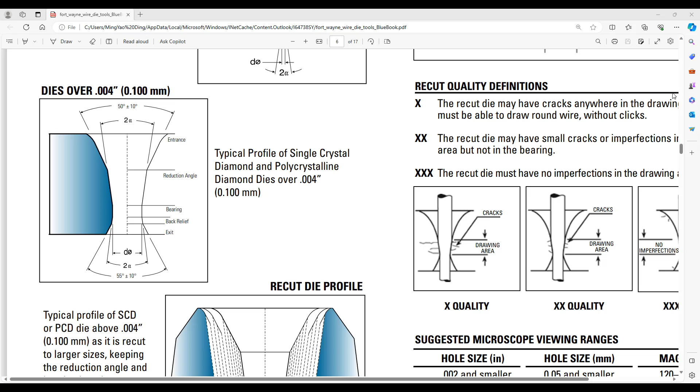This is their blue book, so I'm going to give a quick demonstration of how we can model wire getting pulled through this die using Ansys Mechanical. So we're going to start with this, and I'm going to take a picture of it. We always need a geometry when we do analysis, so this will be my geometry. A simple picture. Then I'll start going to the Ansys Mechanical analysis system and start by creating this geometry for a static structural simulation.

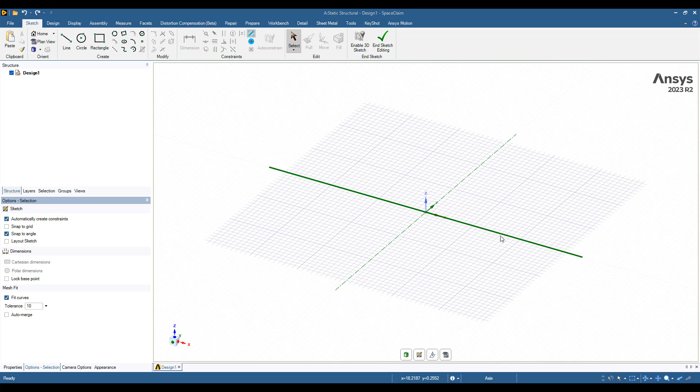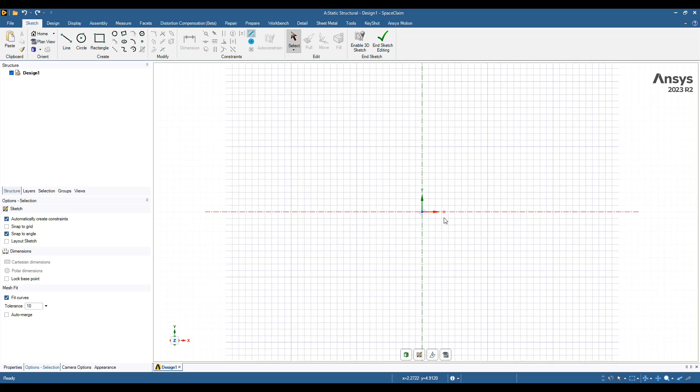Okay, here is my Ansys SpaceClaim, a CAD modeling tool. I'm going to start by sketching on the XY plane. We're going to do an axisymmetric model, which means Ansys would require us to have our drawing be on the XY plane, and it needs to be on the right hand side over here. So I'm going to copy and paste my picture in.

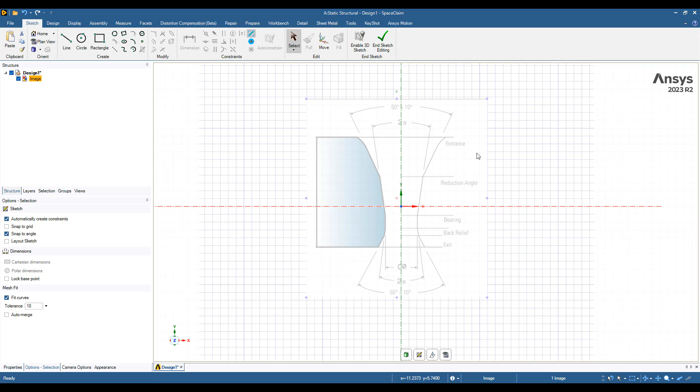You can see I can kind of carefully line it up with the background image where this line of symmetry is. I want to extract this and move it over. So I want the actual die part to be on this side. So I'm going to do a rotation and rotate it about, let's try to move it back into the right location here. Looks like the way I cut it, but that looks fine. So we're going to feed the wire in from this side and have my diamond die over here. So I'm going to show you the whole process of doing one of these.

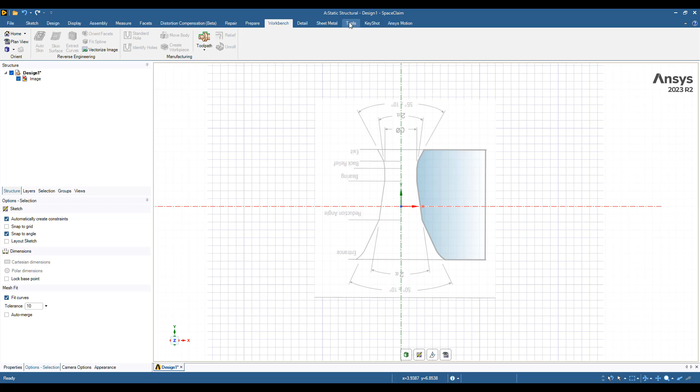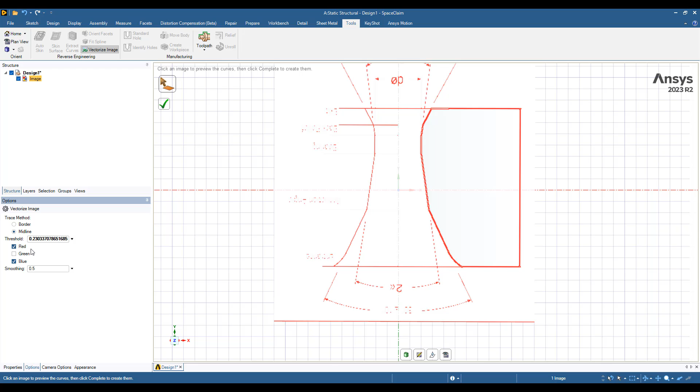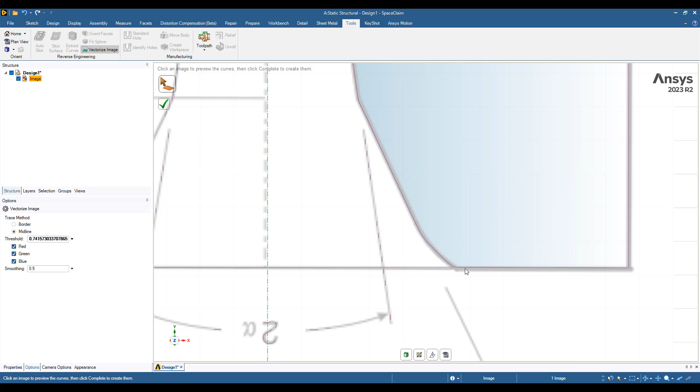We have an option to vectorize this image. You can see it's automatically creating a vector. We want to do the midline, and I want to maybe not include the green part, and maybe change the threshold a little bit. There you go. So that pretty much looks like it's got a good capture of the shape of the die. Obviously, if you're using CAD tools, you can create these much more easily.

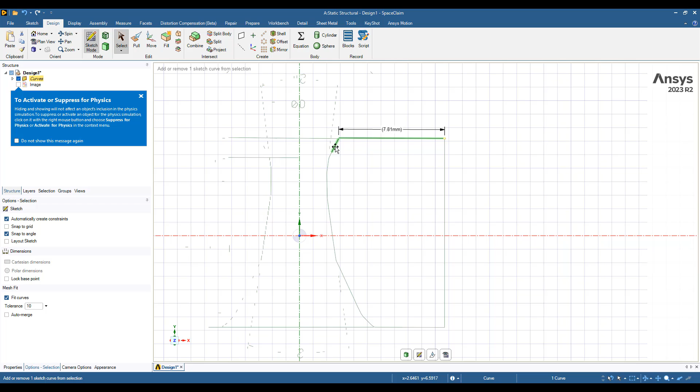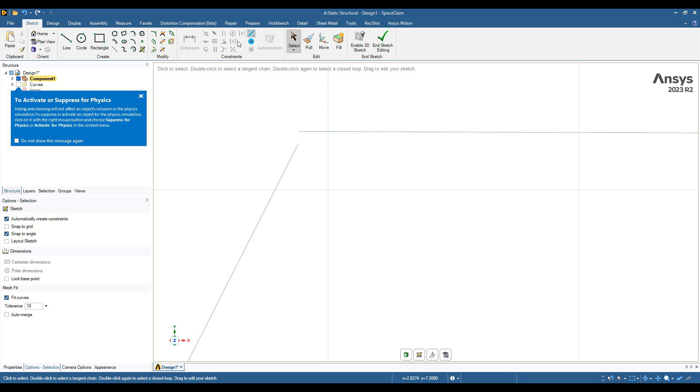So I'm going to hide my image here and select the curves. Gotta get out of my, there you go. So these are the curves I want. And copy and put the curves in there so I can get rid of the other curves. This is the only one I don't need. You can see there's a little bit of a mismatch here, so let me patch up that curve. There you go. Let's go ahead and trim out any excess over here. And that looks like it's a pretty good fit.

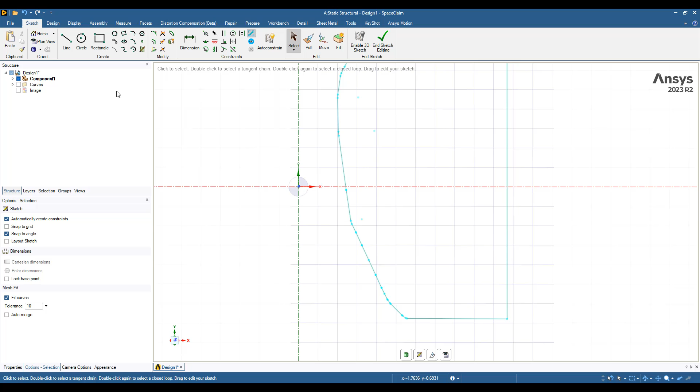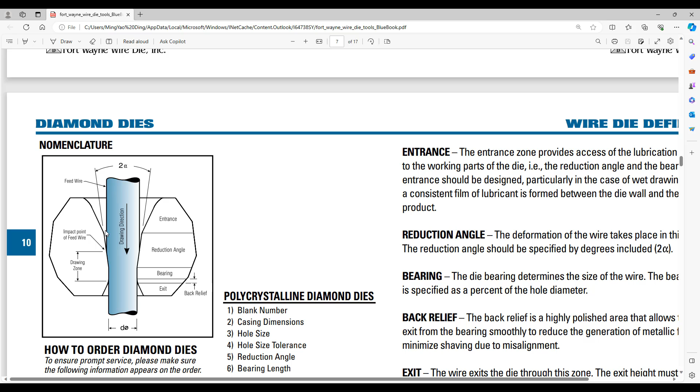So let's delete all my other curves, and then I can select all of this. And I'll use my fill button to fill it in. So now I have a surface that represents my curves. Okay, so that is the die, and the cable will go through here. I'm not a cable designer, but it looks like the cable should intersect maybe the middle of the first angled section after the flat section. So that to me is somewhere over here. So let's go ahead and do some sketching.

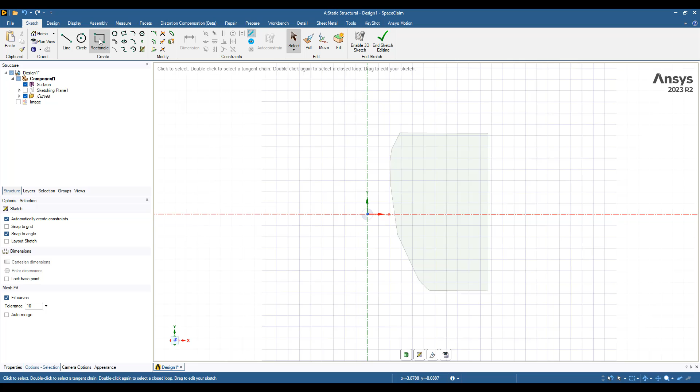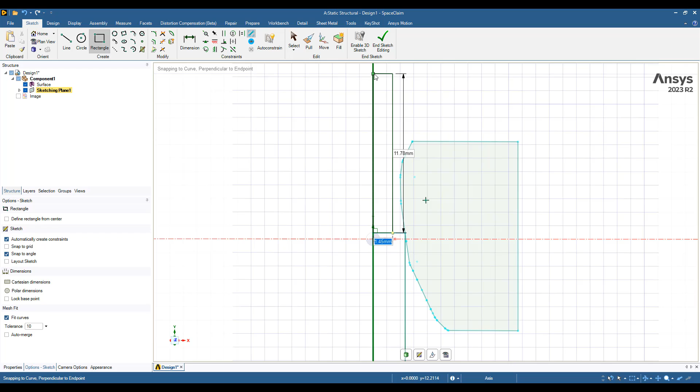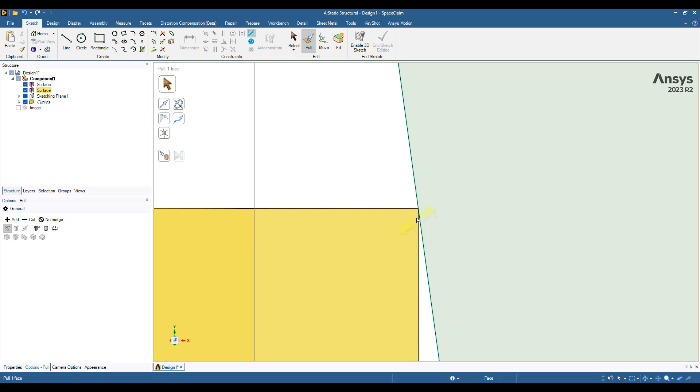We'll go back to sketch mode on this, and we will maybe start somewhere here and draw a cable. We're going to use the center line here, the y-axis, as the line of symmetry, and I'll go ahead and do another cable here so I have something to pull on. Trim out the excess, and I think if I hit the P button here, it'll fill that out as well. It's a pretty sharp corner. Let me round it out a little bit.

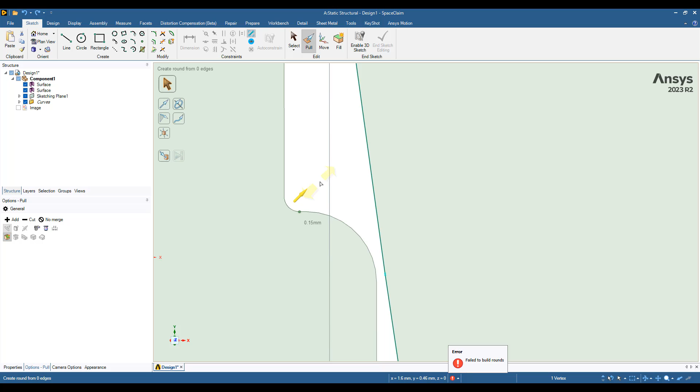So let's do a pull, let's kind of round out that corner so it's not so extreme. Maybe 0.15 millimeters, and maybe I should pull this out a little bit too. Okay, so that is now a geometry that we can start simulating. We're going to pull this inwards. It will deform as it goes through the die.

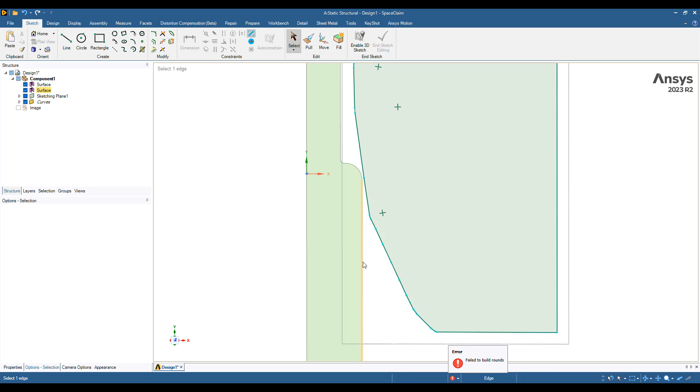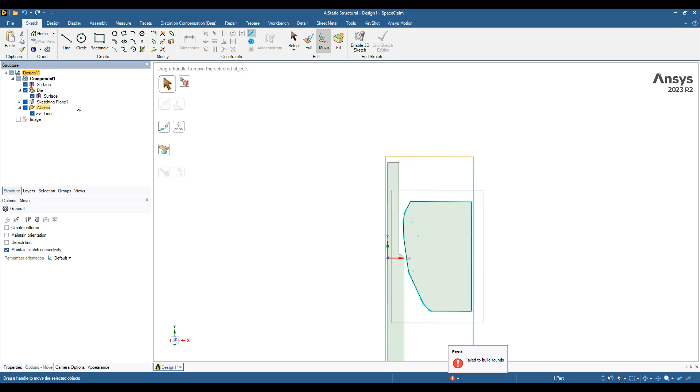Maybe I should move this a little bit closer, perhaps. Make it a bit thinner, so that it doesn't take quite as much force to pull this through. So let me name a few things here. So this one will be the die here, and this will be my cable, a wire. Now we can make this a two-part wire. You can make it coated with different materials and all of that, but I'm not going to do that in this example.

Okay, so now let's take a look at the property of this analysis. Currently it's set as 3D. I'm going to do a 2D axisymmetric model, so I want to change my analysis type from 3D to 2D, and then go into Ansys Mechanical to set up the rest of the simulation.

Okay, so we have the die and the wire. They're both... oh, there we go. Plane stress. This should be an axis symmetric model. So now it's automatically going to consider this to be revolving around the y-axis.

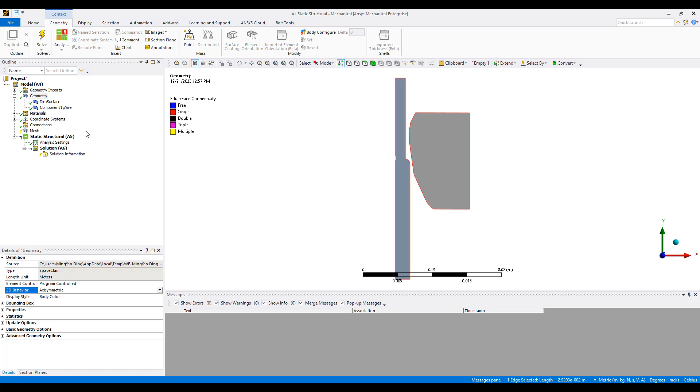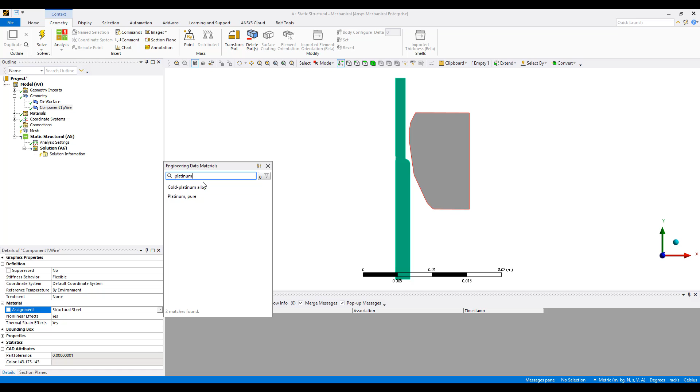The die will be made of a diamond material. So let's see what kind of diamonds we have in our database. There's a diamond carbon. Some of these other things may have some sort of diamond information on it. And then for this piece, let's make this platinum, pure platinum. That's the wire.

Now we want to define the contacts. Normally Ansys would detect the contacts automatically, but in this case, because the gap is fairly large here, it did not automatically detect that contact. So I will define the connections. Let's have a frictional contact

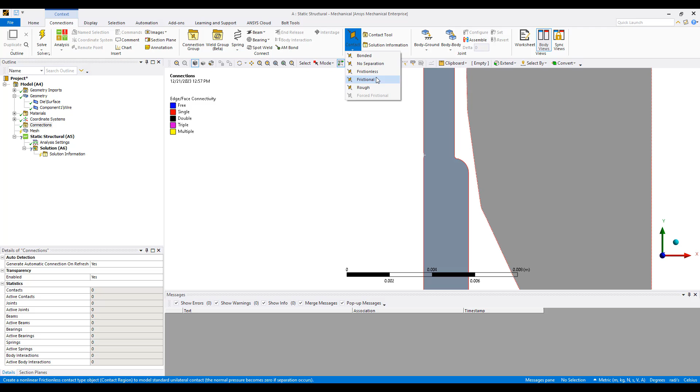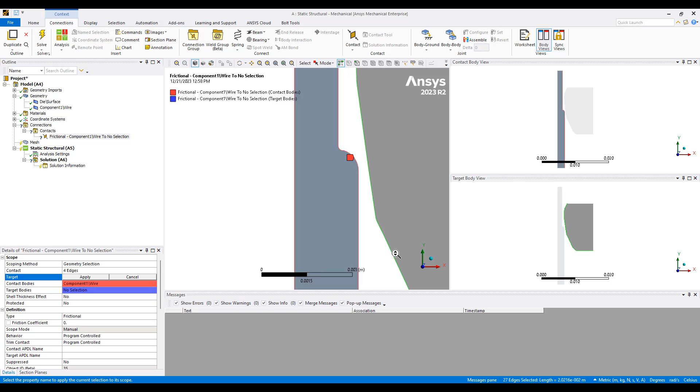of this edge, and here. I guess I should include all of this. So this edge will contact, I just want this edge here, this entire green highlighted edge here. Give it a frictional value, let's say 5%, and we should be able to leave everything else automatic default.

Let's take a look at the initial mesh. The initial mesh is usually fairly large, so if I generate a mesh here, we can see that's the mesh. This side probably looks okay. We don't need to have too much more detail here, but on the other side, we definitely want this piece to be more refined. I'll show you two mesh operations here. One is I'm going to put in a sizing.

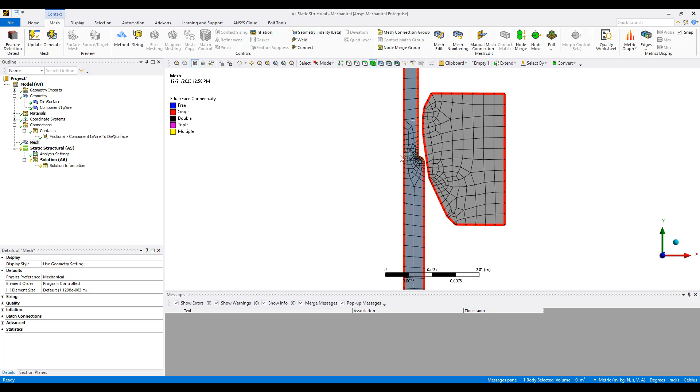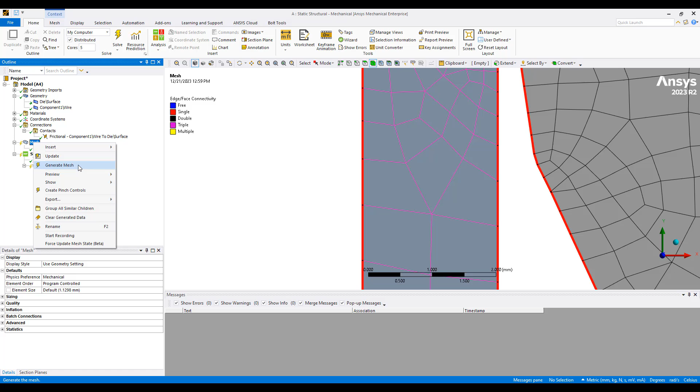So the default size, I want probably at least 3 elements across. Let's switch to millimeters here. So the whole thing is about 2 millimeters. So let's say 0.75 is the size of the mesh on this side. Okay, that looks a little bit better. And we can also put in something called inflation layers.

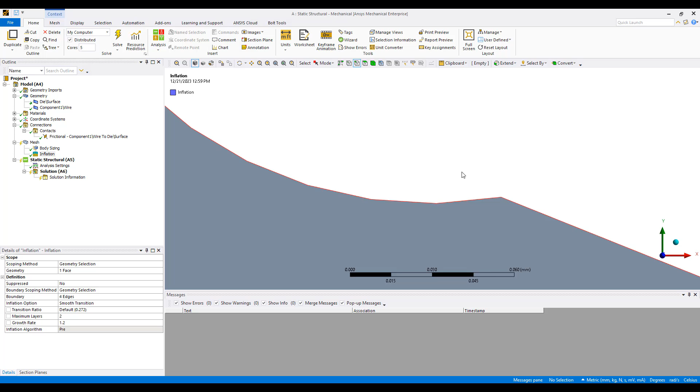And this allows me to select these edges. It looks like that's a little bit too sharp there. Didn't quite want to make it look like that. I'll just fill this in. And so I adjust the geometry a little bit over there to get rid of that weird little angle. And let's update the model.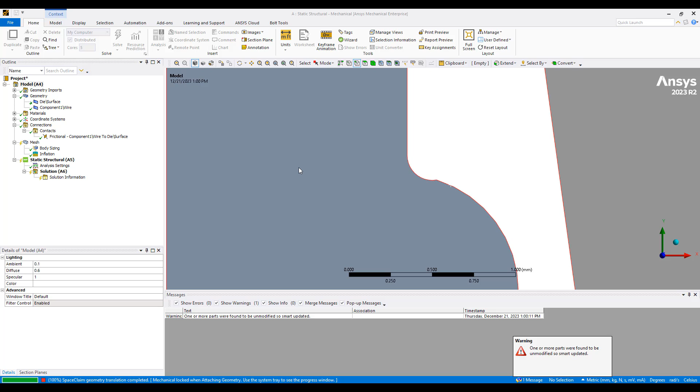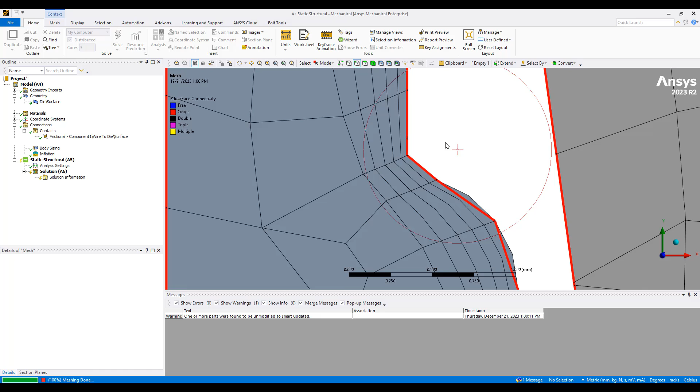So one of the nice things about Ansys is that we can make changes to the geometry. It retains everything else we've set. The frictional contact is maintained. The inflation, including this part right here, and I'll do 5 layers of inflation. Because we really care about what the stresses and the plastic deformation look like in the contact region.

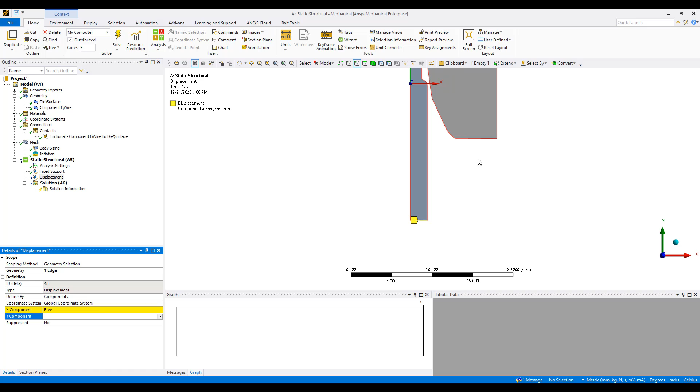Okay. Now let's go ahead and support it. So we're going to put a fixed support on this side. We're going to start pushing this in. Insert, let's say, a displacement, and we want to make the x direction free, so this will be able to expand if needed. But in the y-axis, we want to move this up. So we want to push this part all the way over here, so maybe 10 millimeters. Looks like if I do 10 millimeters, this bend will be all the way out there, so that should be okay.

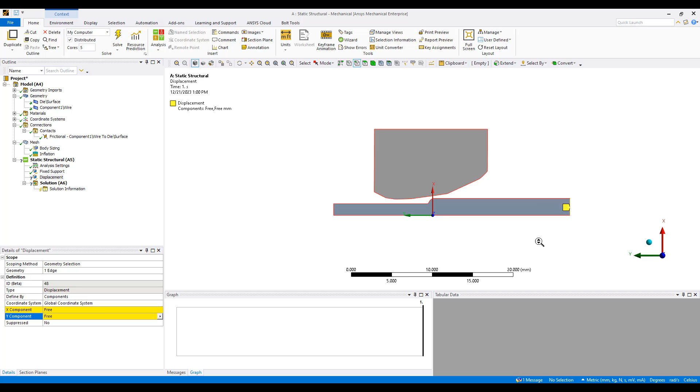So move by 10 millimeters, and usually there's some sort of pull force here as well. Not sure what a reasonable pull force is, but I'll do 100 newtons in the y-axis. Maybe 20 newtons. Let's see how that works.

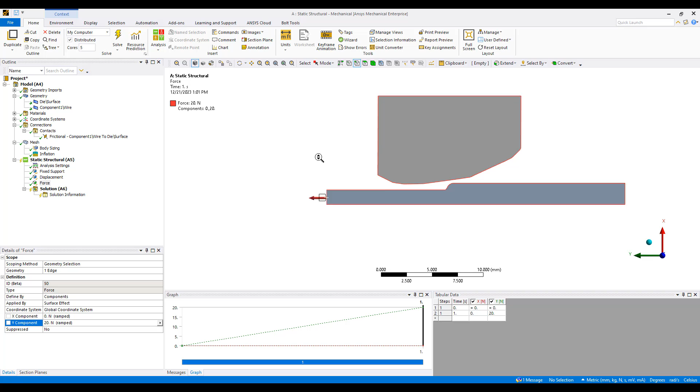One of the things that's helpful in this case is because there are a lot of elements that are going to be in contact and sliding, there is a detection method that's called combine. This checks for all the different contact possibilities, which makes it easier to detect when contacts happen. And finally, this will be a large deflection problem, and we're going to turn on automatic time steps.

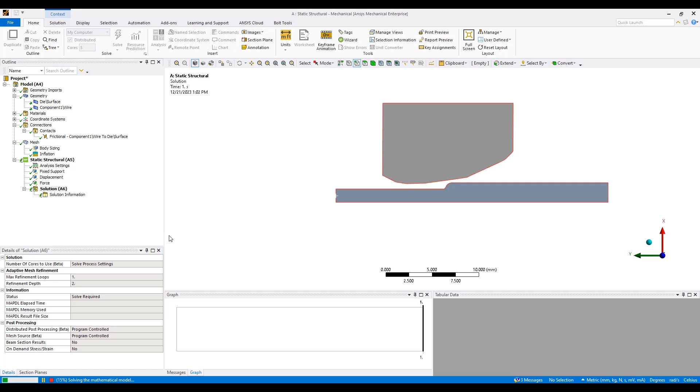So we're going to start with, let's say, 100 sub-steps, and then we're going to let it run to take very small sub-steps. This allows us to make sure we get convergence. If it fails to converge, it will update the analysis and rerun it from the last converged solution with a smaller deflection. So it's off and running.

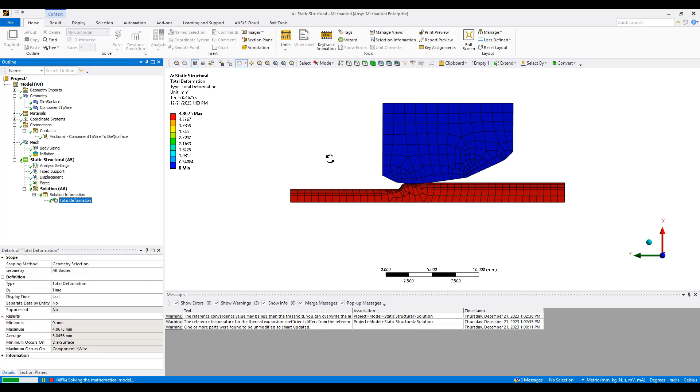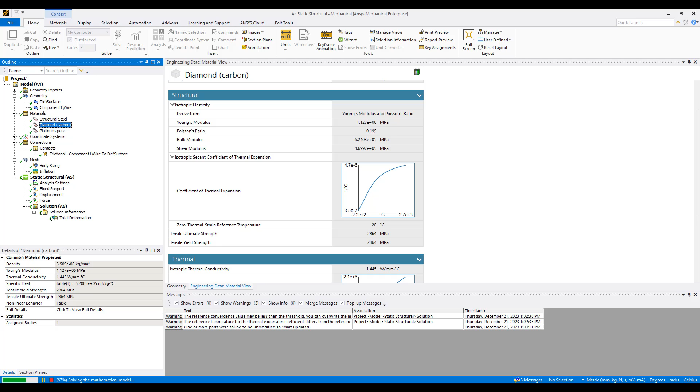Maybe making it a little bit. We can look at the material properties. Ansys does have plasticity curves for many metals. For diamond, it's just a linear elastic curve, but we do have a temperature-dependent thermal expansion coefficient. For platinum, we do have a plasticity curve, so this is including metal plasticity in the model.

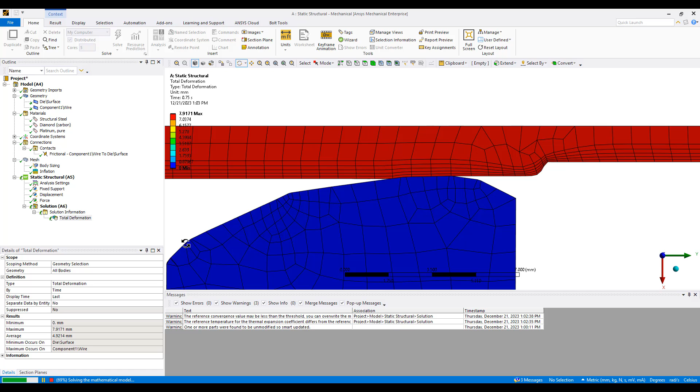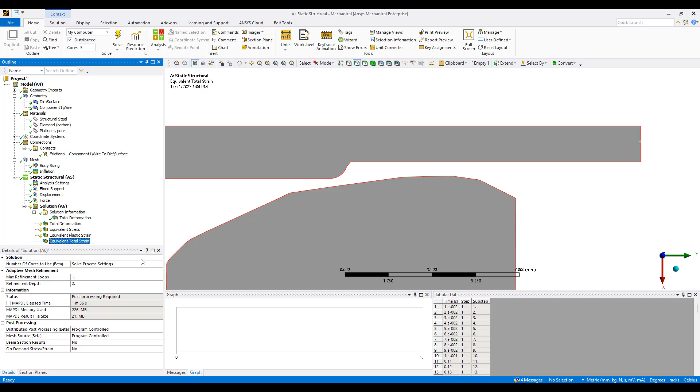Okay, so it's making my wire slightly thinner. Okay, it's at 87% here. Okay, so now once it's finished, we can look at lots of things. We can look at stress. We can look at strain. I want to see the plastic strain as well as the total strain. Let's grab all of those results and take a look.

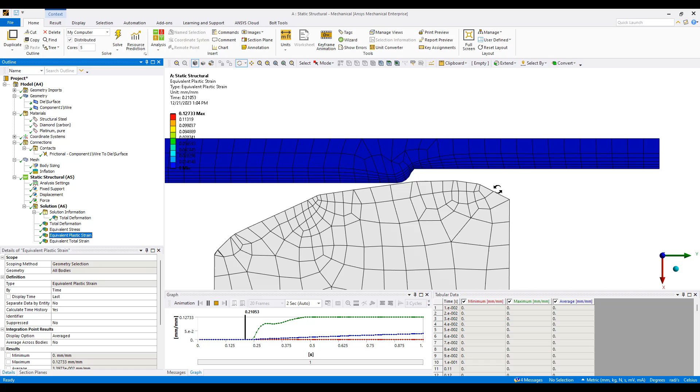So the deformation makes sense. As it goes through the die, it flattens out and makes it slightly smaller. Equivalent stress, we can see the stress builds up. Plastic strain, so there's permanent deformation in this region. And then total strain. So that all makes pretty good sense.

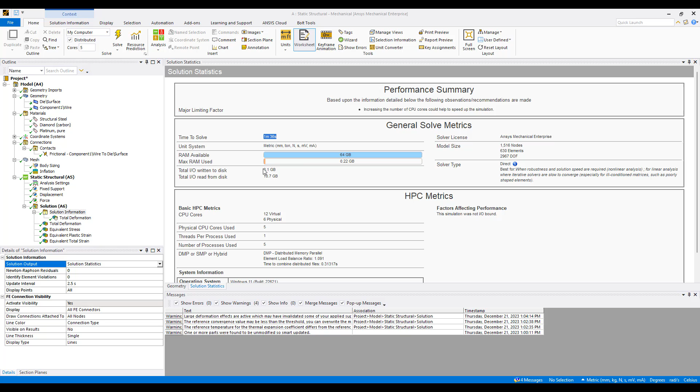You can see this is running on my 6-core laptop. That's about 5 years old, and the whole simulation time, I think there's solution statistics here. So let's see, it took a minute and 36 seconds to solve. It's a very small model, so these are very good models to learn analysis, nonlinear simulations. But it's not really very interesting if it only moves a little bit.

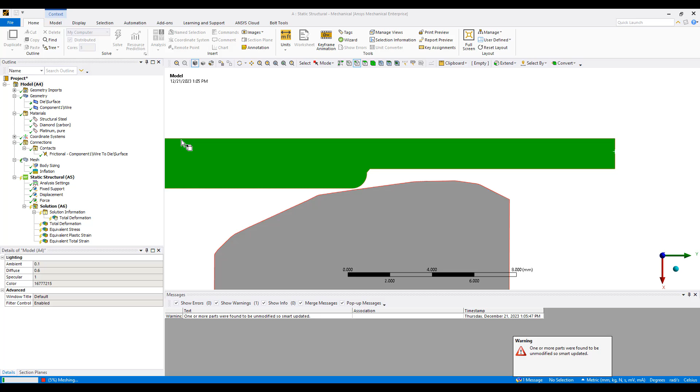So let's adjust the geometry a little bit and see what happens if I move my wire, make it thicker. So geometry has been adjusted. I update geometry from source. I hit solve, and it automatically meshes based on the previous settings and starts solving this new simulation with a much thicker wire.

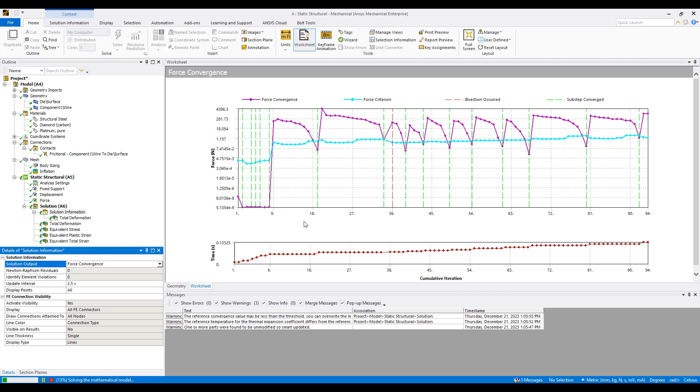Let's go back to looking at convergence history, 13%. So we're still cranking through this very nicely. Maybe platinum is a fairly soft metal. Let's see if I can show also, there's a stress plot tracker and a strain one. These will be much more interesting, I think. So we can get the results as we're solving. Okay, yeah, so it's much higher strain here as we try to push this through the die. Still converging very well though.

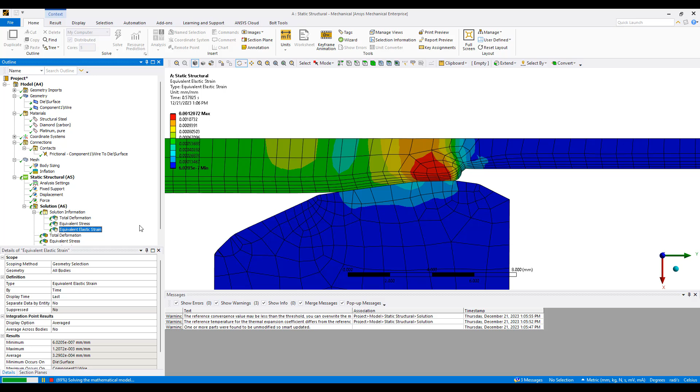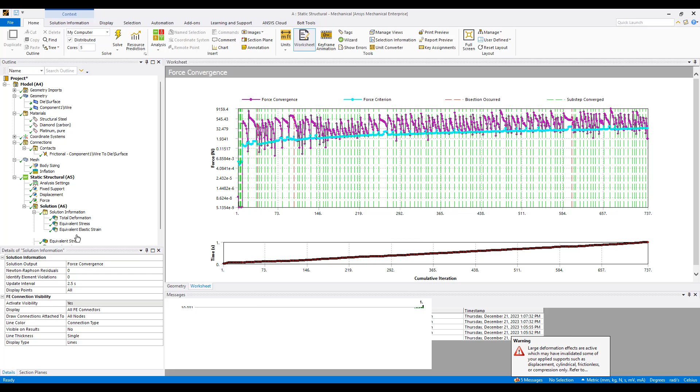Okay, much higher deformation. It's almost done here, 69%. Okay, let's run the simulation. We can see the way the part deforms now. You can see the part swelling up on the back as we try to push this wire through the die. Let me turn off my

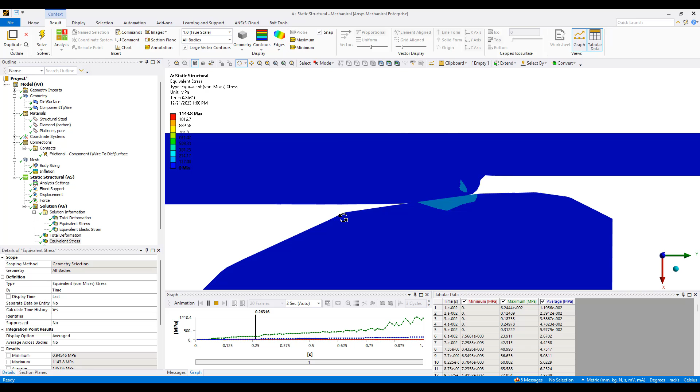contours here. Equivalent stress. So initially the stress is relatively low, but then when this corner hits, it kind of bites into the wire, and then we get all kinds of problems. Plastic strain. Same thing, once we get past this little corner, things kind of go wrong in this wire pulling example.

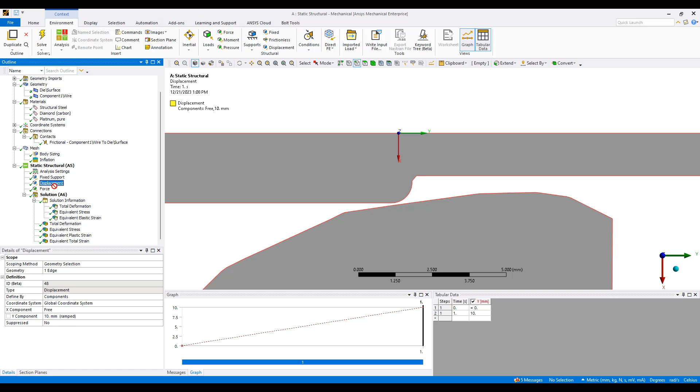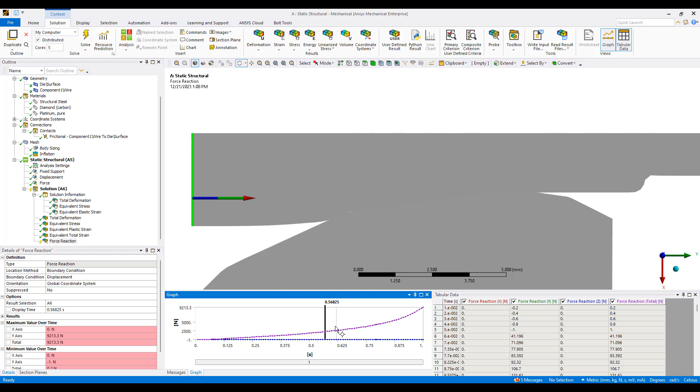And total strain. We can also figure out how much force it takes to push this through just by dragging the displacement into the solution and evaluating the force. So initially it's taking about a few hundred newtons, but as we pull it in, because of the way this part thickens up over time, the force increases as it expands, the metal gets built up in the back. So maybe I need to have a stronger force pulling on it.

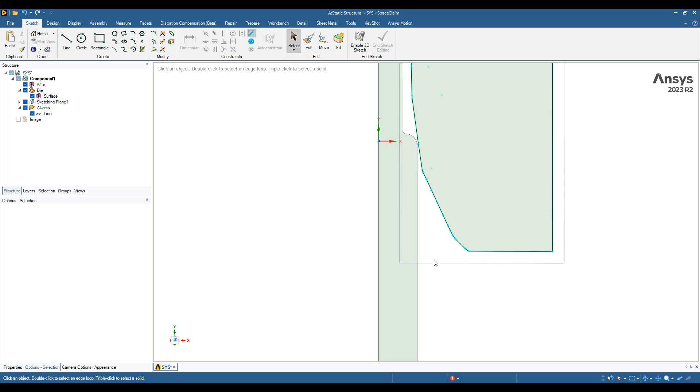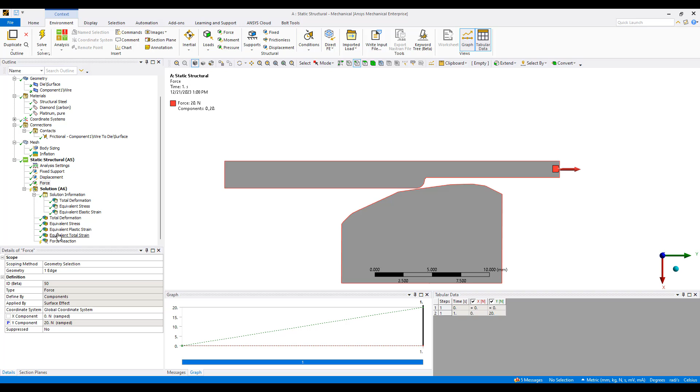One of the important parts of Ansys is that we are able to make everything a parameter. So I can make the pull force a parameter. I can go in here and make the thickness of my wire a parameter by clicking on this P. And now I could do a parametric analysis. I can, for example, go to my simulation and start making results parameters too.

So maximum stress may be a parameter, maximum plastic strain could be a parameter, force reaction total can be a parameter, and now I can do a wide range of design optimization studies to try to figure out the right parameters I need for this particular die if I want to do different thickness of wires with different force or pull conditions. Hopefully that's helpful.

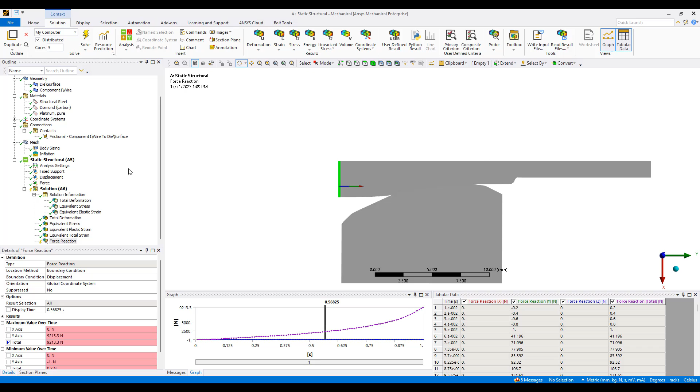There's a lot more capability. I'll try to include a few more in future videos, but thank you very much for your interest in this model. I thought it was very helpful for some of our customers and prospects to be able to do this type of simulation. Although I'm not a wire pulling expert, the tools can be used for this industry, and it's really easy to solve since it's a 2D axisymmetric example.